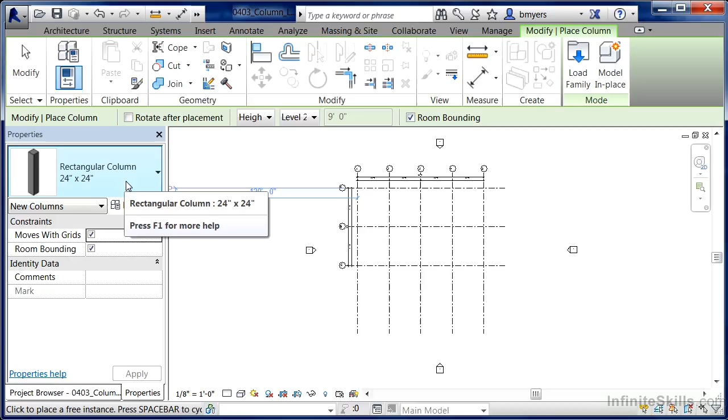You'll notice that underneath the Type Selector list under Properties, we currently only have a rectangular column loaded in our project, and it happens to have 3 different sizes associated with it. What I'd like to do is load in a round architectural column into the project.

To do this, since we already have the command active, the quickest way will be to come over to Load Family. There are technically 2 different spots where we can load columns into a project. The first one is right here at Columns, and ultimately this is where we're going to be going. This is where all of our architectural columns are located at.

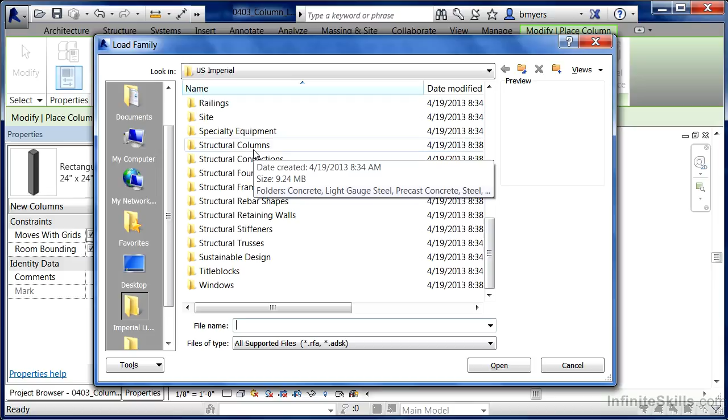There is another spot called Structural Columns. Anything underneath the Structural Columns folder is going to be specific for the Structural Columns command. So we don't want to do this right now because we're going to be loading in architectural columns, and that's what we have loaded as our command.

So come back up here to the top and double-click where it has Columns. Here we have a few of the default column shapes. You can see that we have some of the more ornate ones, including Doric. But the one that I want to choose is going to be the round column.

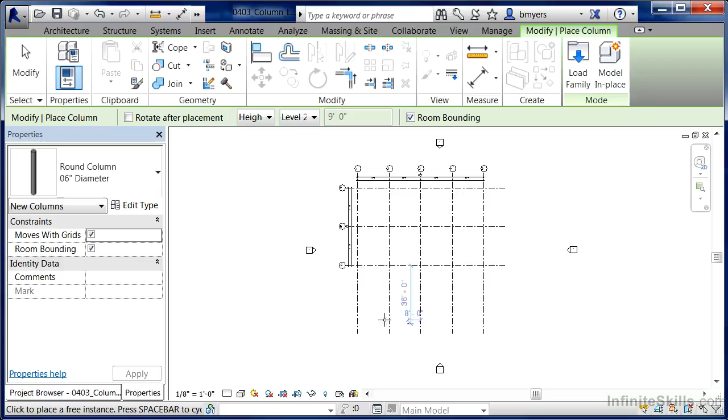So highlight on Round Column and click on Open. When you do this, over here underneath Properties on the Type Selector list, we'll now see the round column family has been added, as well as 3 different sizes associated with our round column family.

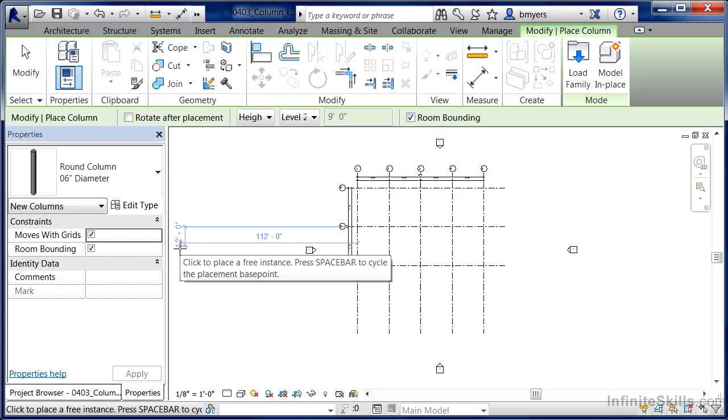Now, these were architectural columns, and if at this point I'm going to place them in, I could. But let's see the process of being able to load in our structural columns next. Hit Escape a couple times on the keyboard to get out of the command.

Now technically we could have gone through that exact same process and then selected on Structural Column, Load Family, and then loaded in structural that way. The other option that we have is, instead of coming through the command itself, to come up here to the Insert tab and select on Insert and simply selecting on Load Family.

Find that Structural Column folder, double click on it. Next, find the shape that we want to be able to load into the project. I'm going to double click on Steel in this case. We can see the different shapes that are available. I'm going to choose the very bottom one, the W-wide flange column, and click on Open to that.

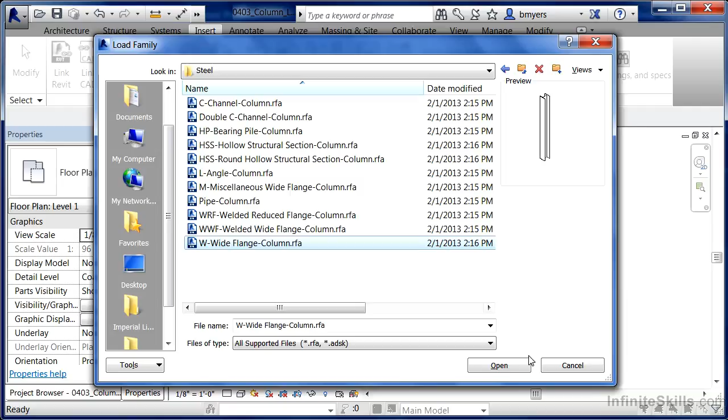Now, unlike that architectural column, once you load that family in, it will load all the sizes in as well if you don't have the defaults changed from what they are. By default, with structural columns, you'll get a list of all the different sizes that are available. So instead of loading all those sizes in at once, the structural columns will allow you to choose which sizes you want to be able to load off of the list.

And you can see that you have basically the entire structural steel catalog and its sizes loaded here into the project. Just so you can see it, I'm going to highlight on the very last one, the W4x13, and click on OK.

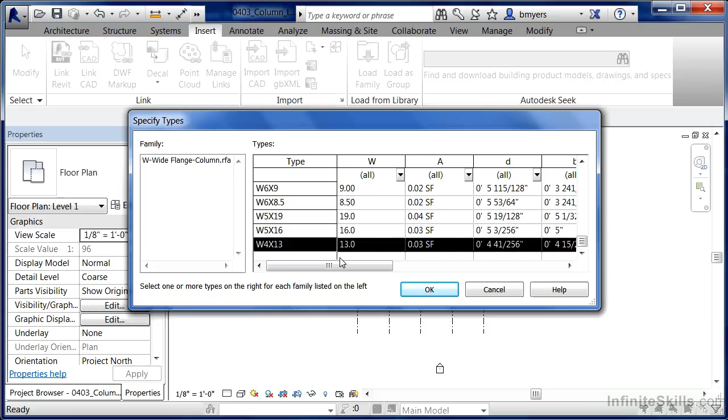It may give you a big warning message saying, do you want to override the existing version? And that's okay, go ahead and do that. It's not going to actually hurt anything.

Basically, it's saying there's already a W size column loaded into the project. Do you want to add extra sizes to it? And we're going to say yes to that question.

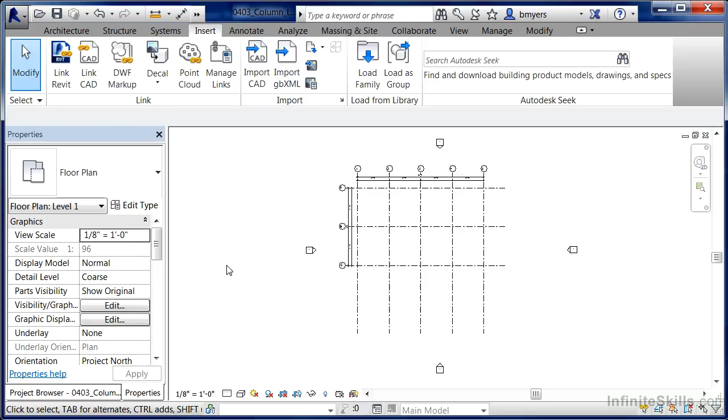Now that we've done it, you'll notice that it's not automatically trying to place it because we're not automatically in the command. We would have to once again come back underneath Architecture, execute the Structural Column command, go to the pull-down menu, and right here where we have the W4x13, this is that new size that we had selected off of the list. And if we pick it and move over into the drawing area to place it, we would now have that W4x13 column inside of our project.

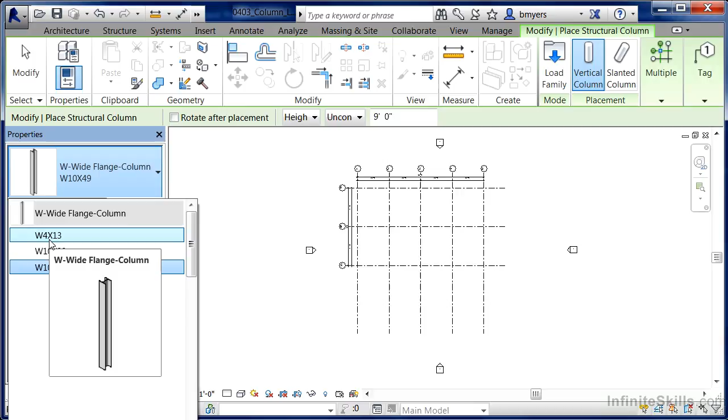So just remember, there's 2 different ways to be able to load your different kinds of families related to columns into a project. The first way is to actually activate that particular command and select on Load Family. The other way that you can load in families, in this case column families, into your project is to move over to the Insert tab, click on Load Family, and find the appropriate family style off of the list.